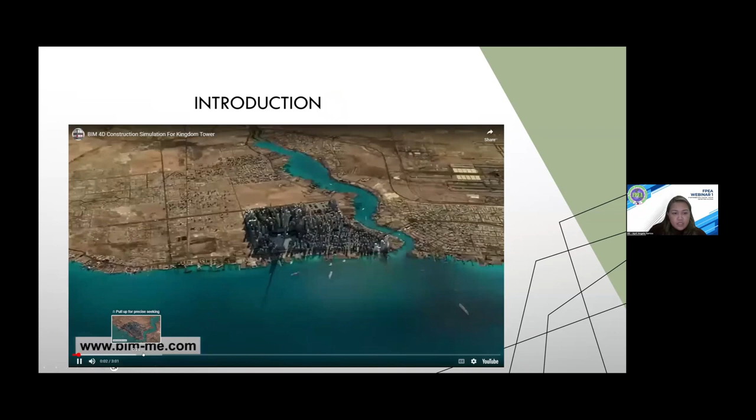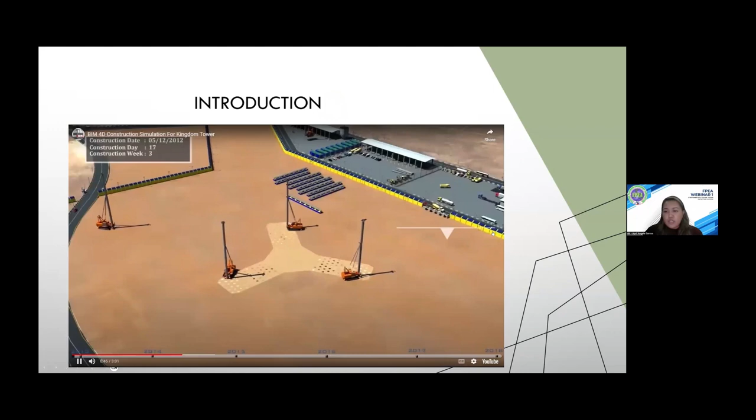Does anyone know about 4D? Do you have an idea about what 4D is? Have you seen videos like this?

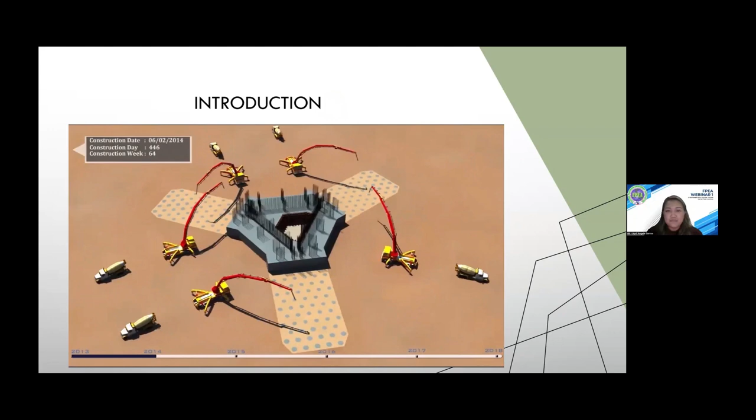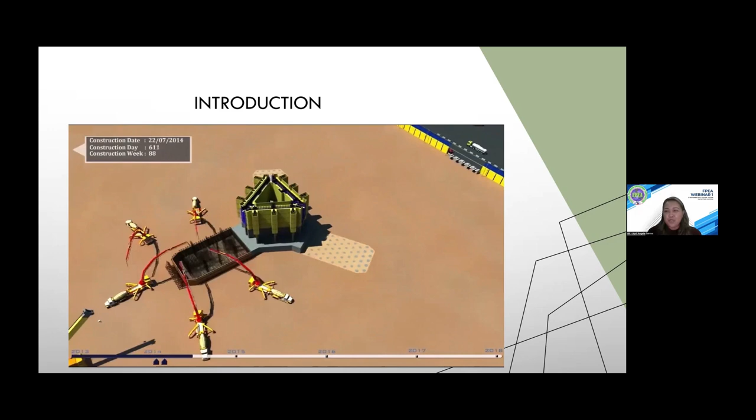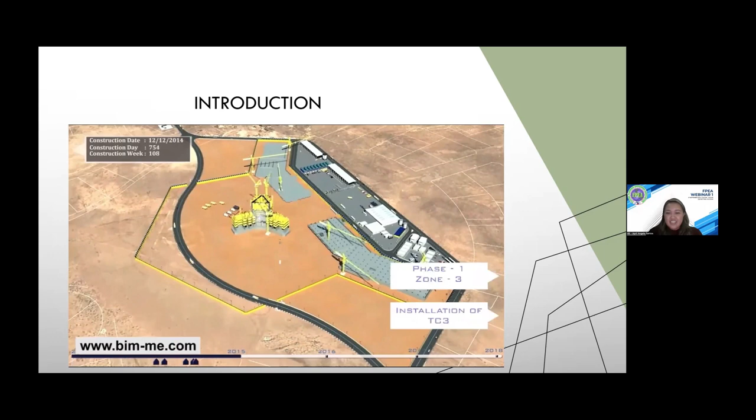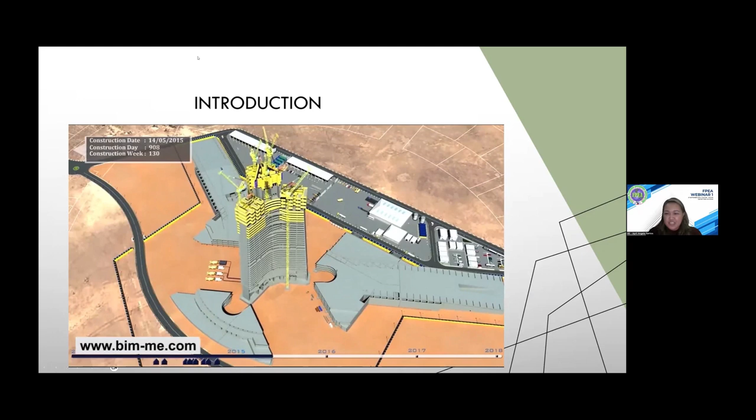But in 4D in construction, has anyone among the attendees seen or experienced doing a 4D model? Anyone? Or are you all asleep?

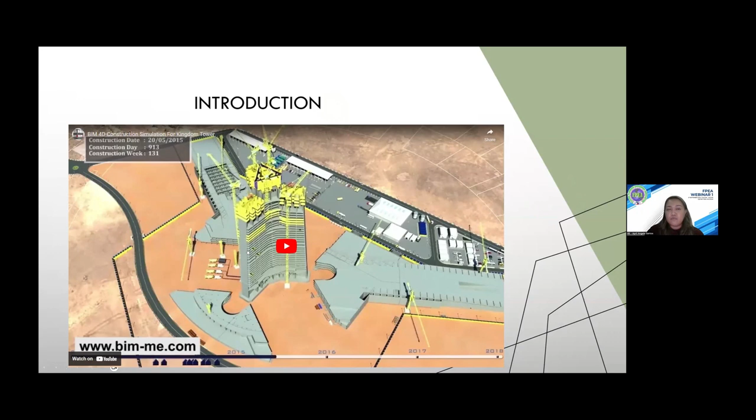So why is it called 4D? We have 2D, 3D, 4D, 5D, 6D, I think up to 10D in other countries or firms. When we say 2D, these are the plan drawings, or in terms of Gantt chart, planning, or our documents - those are what we call 2D.

And then 3D, which is the model, has XYZ, that's why it's called 3D because it's 3-dimensional. So this is a BIM model.

A BIM model can be parametric or non-parametric. Parametric means the parameters within the model. In planning terms, this can be the user fields, resources, things like that.

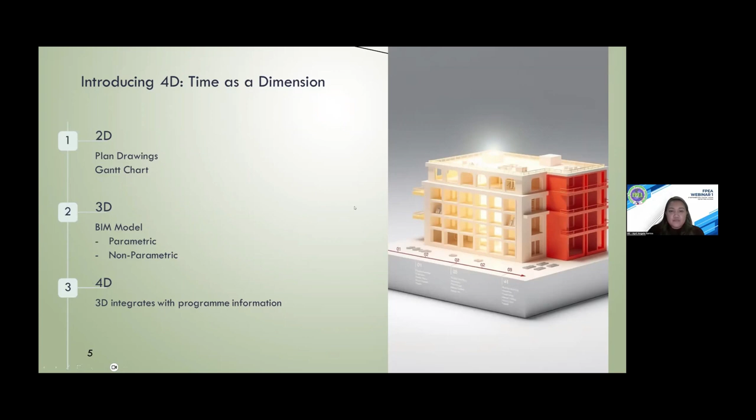When we talk about 4D, we introduce the concept of time into the 3D. So 3D plus time or program information - that comprises what we call a 4D model. Then I think 5D would be cost.

Maybe for some of our attendees who have construction experience, these are some of the challenges for traditional construction. First is time management, because in a project, especially a big one, there will be thousands and thousands of activities in a single project.

So this could mean we don't really see the accuracy of the program. And then there are communication gaps.

How would you relay the program to your project team? Would you just give out the whole program, like the P6, the Gantt chart, to the project team for them to analyze? Or would you interpret that program into something like dashboards?

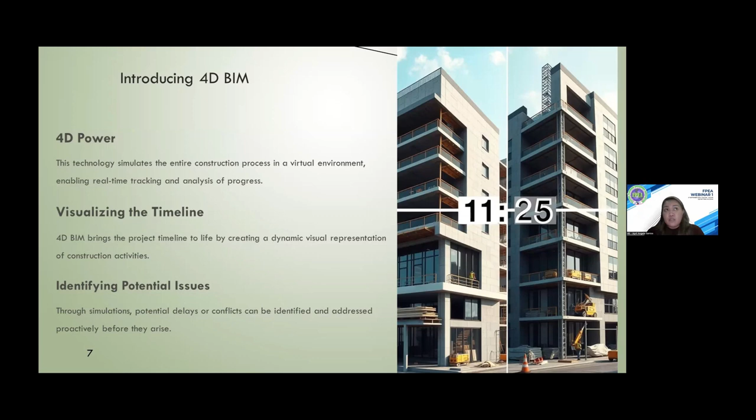So let's go over the benefits of 4D. Let's discuss and share the benefits of 4D.

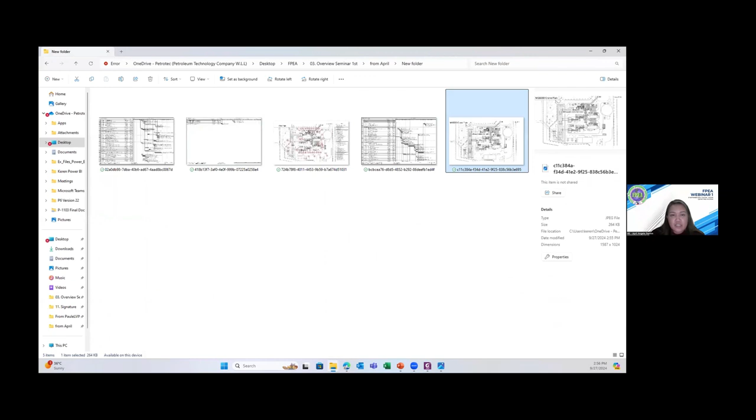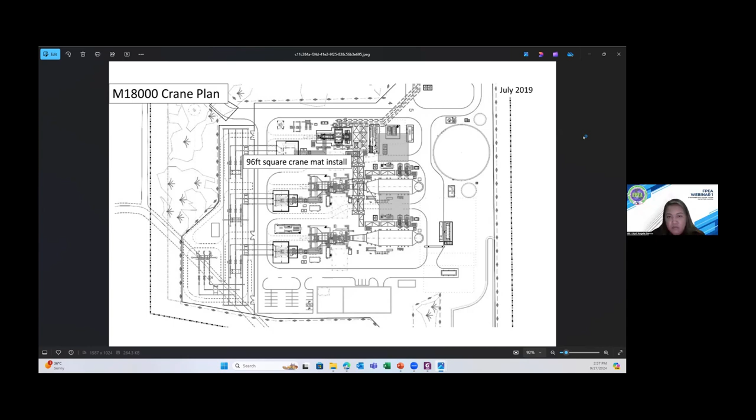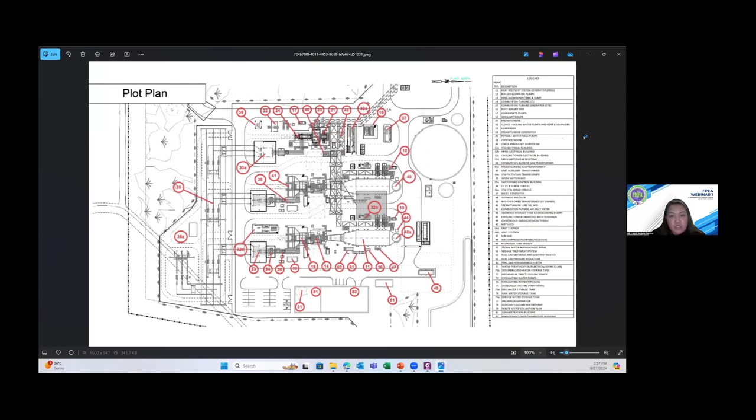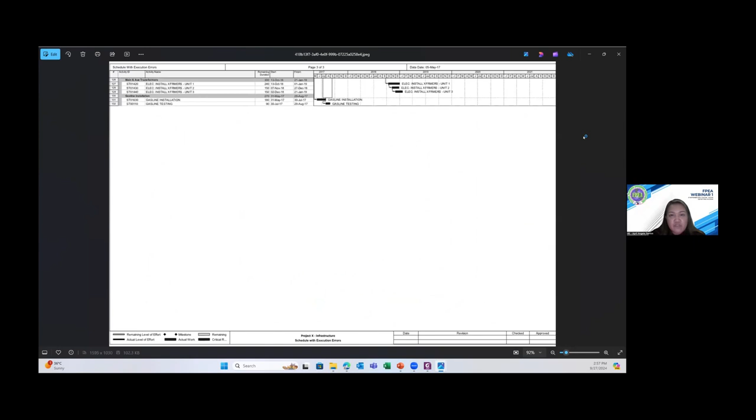Karen, as our boss, will share this program of an oil and gas project, for you to review the accuracy of the program, the schedule. Given this 2D information, the program and then the layout plans.

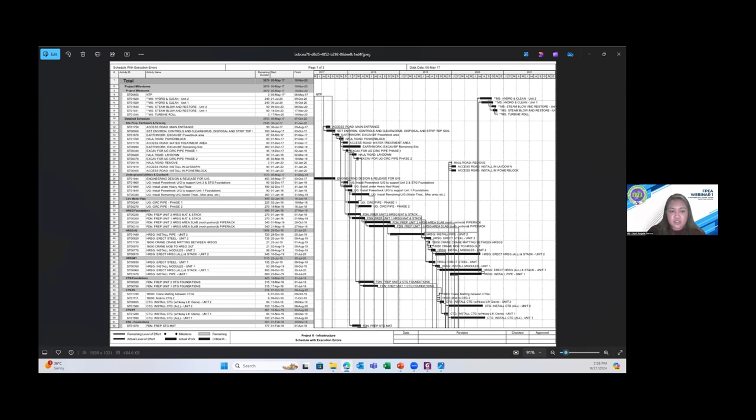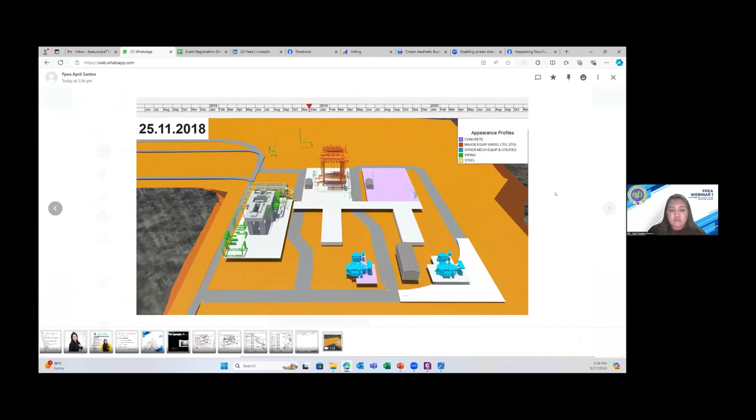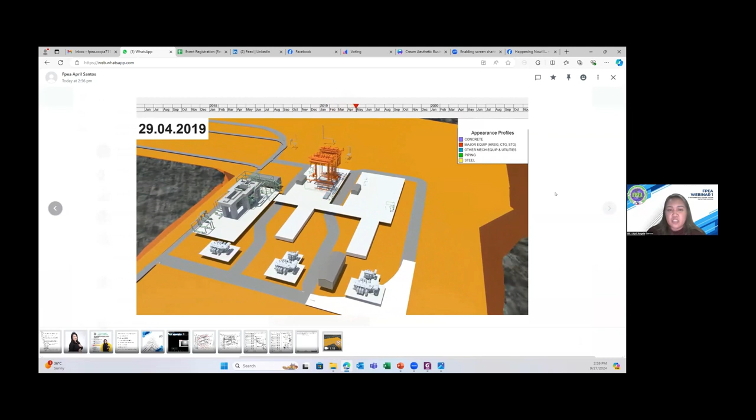How about if Architect Karen gave you this simulation instead? Do you think it would be easier for you to identify what is incorrect in the program? Maybe it's easier, for example if you're in oil and gas, it's easier to identify what are the errors here.

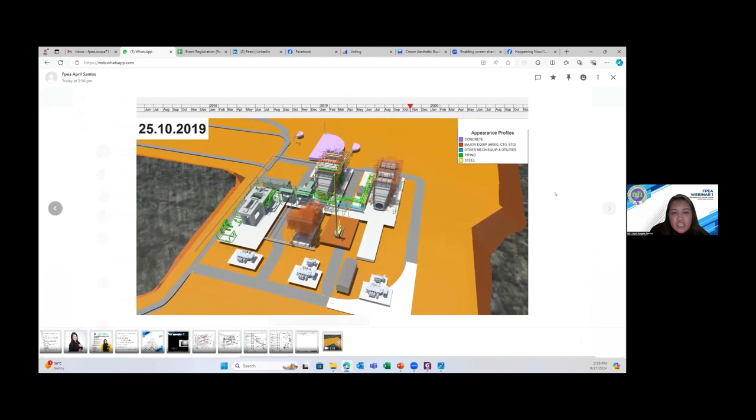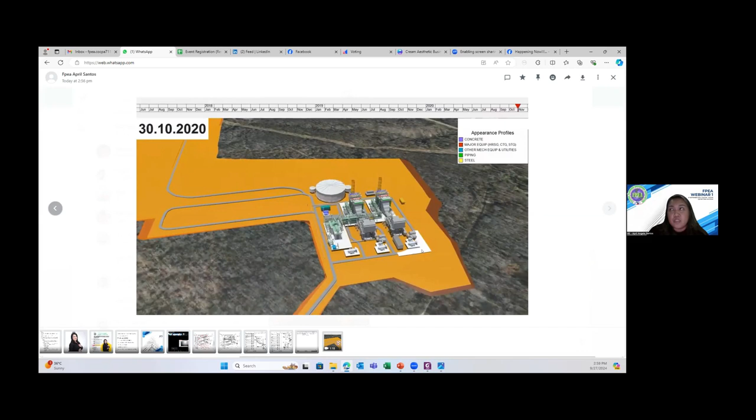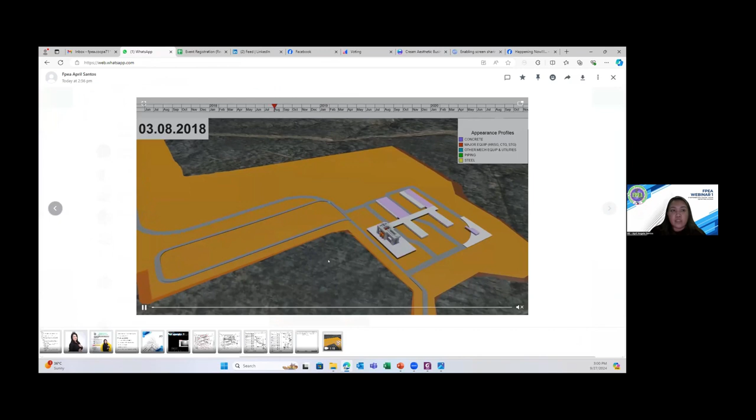So that's what we can see when reviewing a 4D model. It's easier, I think, would you agree if I said it's easier to review the program when it's in simulation form versus in a Gantt chart? Agreed, yeah, agree. Yes, I agree.

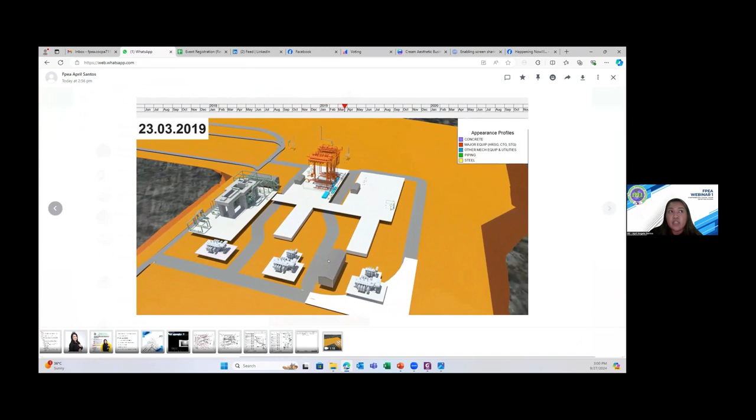In my work, since I create 4D models, I've really experienced these kinds of errors in the program. I only see them while doing the 4D model. So this is actually happening in reality.

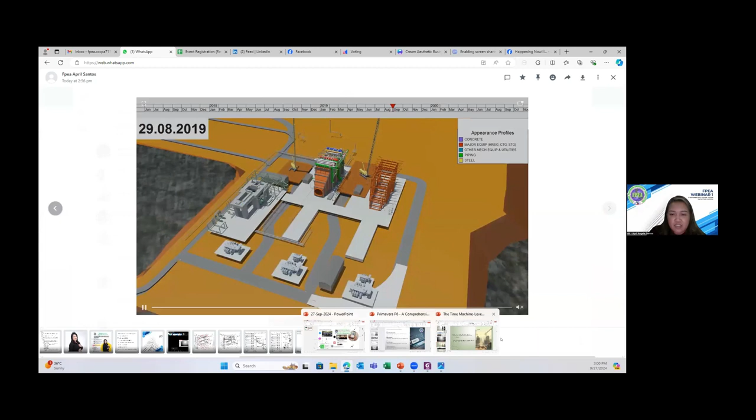Ayan. Kaya na po control.

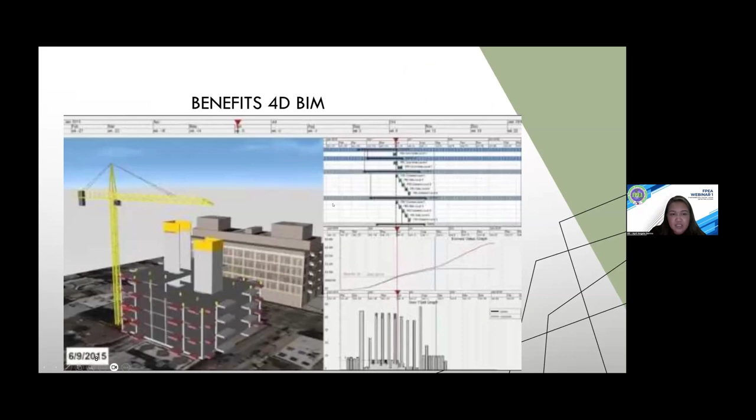So we can say that 4D is an innovative approach to construction project management. We talked about project management earlier. 4D is not a mere visualization but can also be used as a part of project management, so it's not just visual.

So what are the benefits of 4D? It can enhance schedule visualization and conflict detection, like our example earlier. We identified errors in a program from the 4D model, so we can see the clear project timeline if it's correct.

And if there will be some clashes, like what I mentioned earlier, structural versus architectural works, we can use the 4D model and proactive detection to have informed decision making, so our decisions have a basis for why we did that certain decision.

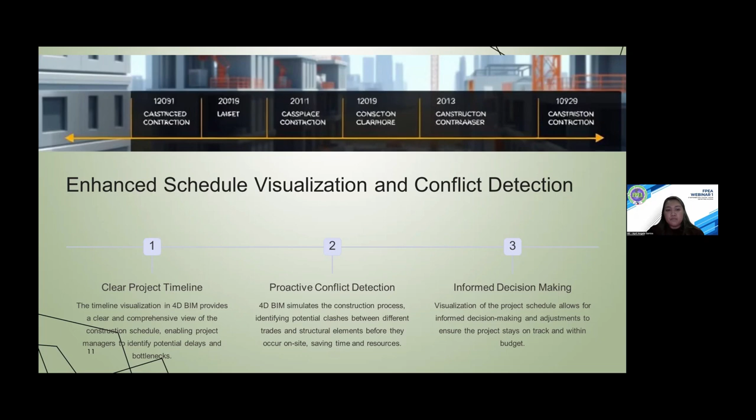Also, when our program is correct, we can allocate the right resources. In terms of BIM, we can actually get quantities from the BIM model and allocate that directly into the activities, so our accuracy for quantity takeoffs that we put into the activities improves.

Because in the BIM model it should be as complete as the actual building itself, we can visualize what works need to be done. And since resources should be properly allocated, we would reduce waste in terms of leveling our resources in our program.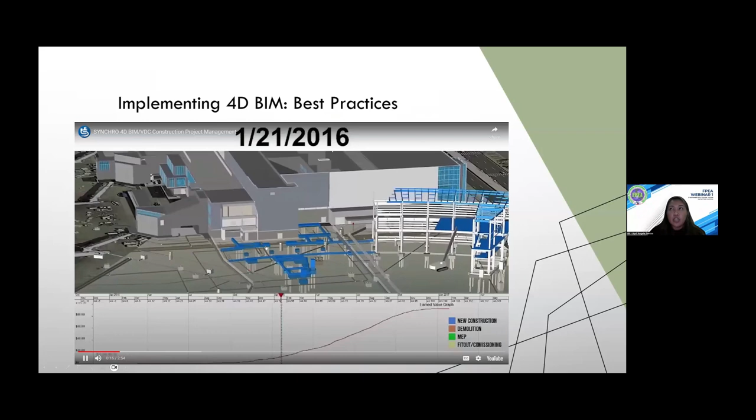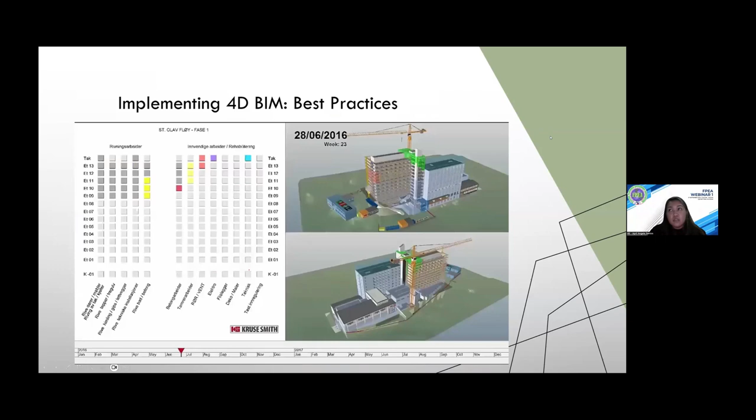So this is what I would call my personal approach on how to start a 4D model, or how you would apply 4D into your projects. This is a summary of my personal experience when I moved here to Hong Kong.

Step 1: define the project scope and goals. Identify the project objectives, define the project scope, and set realistic expectations. When I first arrived here in Hong Kong, my first task was to write down all of the 4D requirements from the tenders, from the current projects our company is doing, and for the tenders we were currently doing as well. I summarized all of that, what the requirements of our clients were.

I think this is the same thing. So if, for example, one of you attendees will be a 4D planner in the future, how would you start doing a 4D model? I think it would be the same as doing a project—what's the scope of the project?

Same with 4D: what are the requirements the client is asking for in terms of 4D? What are the outcomes that the client wants from 4D? Or, you as a 4D planner, what are the outcomes you can provide to improve project management using 4D as well?

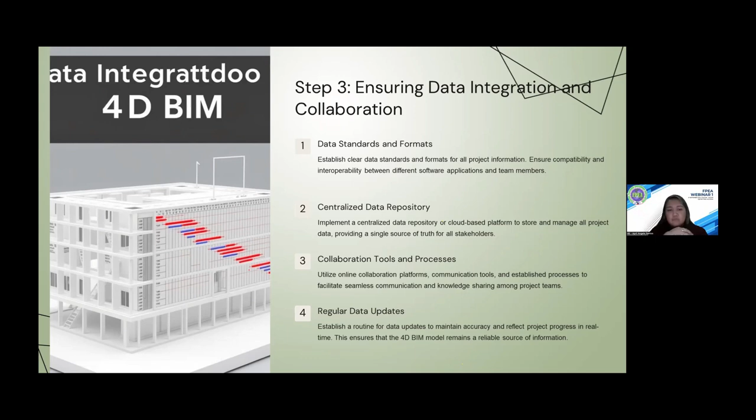That's what we're saying—for example, with productivity, we can perhaps create a database for that, a productivity database, based on resources, those kinds of databases.

Next is change management and user adoption. Even though we've made a lot of advances, like the software and databases I mentioned earlier, there are a lot of people in the projects who are still, I would say, in a traditional mindset. So how do we try to change that traditional mindset?

So we reach out to projects. Since I am a trainer for a specific software, I was able to give them hands-on training. And then from that training, there will be questions thrown out, like how to do this, is it possible to do this?

So they start to appreciate how to do 4D and how 4D can help their everyday activities. So we have trainings, and I think we always have an open line to projects if they have a question on how to do things.

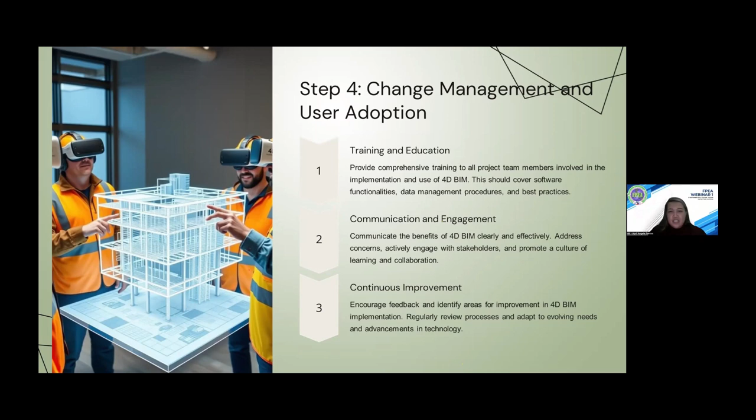Step 5 is overcoming implementation hurdles. As part of our standardization of BIM, including 4D, we had to write BIM standards, including 3D, 4D, and 5D. So we wrote a standardization, and how we did that was through a baselining program.

It's not a baseline program exactly—I mean baselining of where we currently are in terms of 3D, 4D, and 5D. What do we need to improve to get to the point we want? That's how we did our standardization. And then resistance to change, I think that's part of the training, and also the technical complexity.

I think the hardest hurdle in doing 4D is resistance to change. Construction is an old industry, and the way of doing a construction project is still traditional. Not all, but a lot of companies are embracing technologies like 4D BIM that can benefit them. I think just reaching out to people and showing them what a 4D model can do, what output it can produce, can be an answer to that resistance to change.

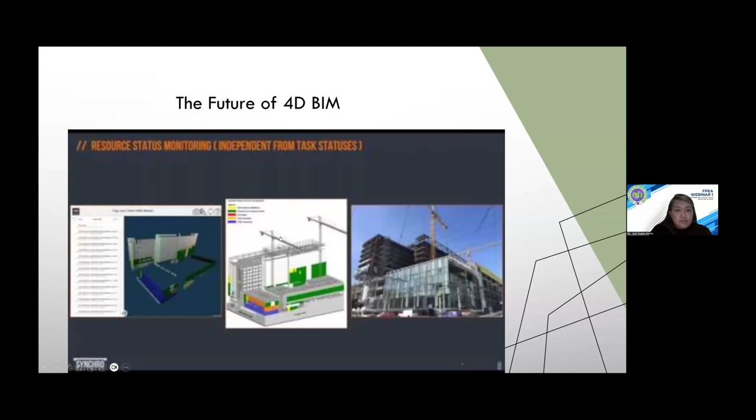I think this is the last one - step 7, adapting with evolving technology. Doc Elvin already mentioned AI and similar things earlier. I think that's not just the future of 4D, but the future of construction. We have cloud-based solutions, like what Doc Elvin mentioned earlier - cloud-based. I was also able to have hands-on training with Oracle OPC Cloud, or Oracle Primavera Cloud. That's one cloud-based solution currently in the market.

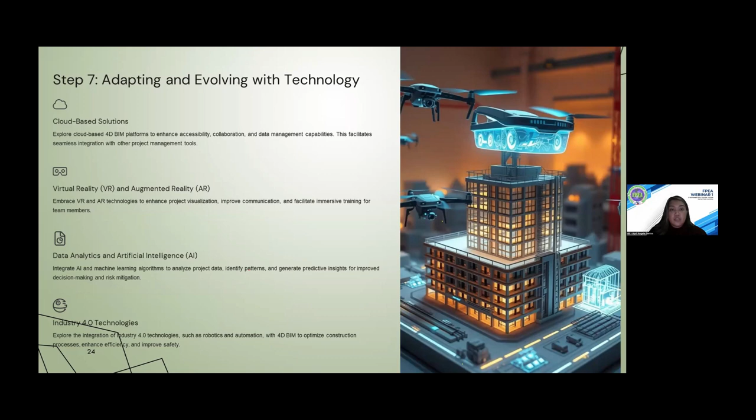I'm not sure if you've seen VR and AR - VR HoloLens, or the new Apple vision glasses. There's also data analytics, artificial intelligence, Industry 4.0 technologies, IoT - Internet of Things. This is the future of 4D, or the future of construction in general. Since I repeatedly say that 4D is a project management tool, we need to adapt to this evolving technology.

The future of 4D - what are the new or future trends in terms of 4D? Dynamic visualization, data integration, simulation and analysis, collaboration and communication - so that's 1, 2, and 3.

This is what I mentioned earlier - how would you collect all of that data and use it in a 4D model, then create an output from that 4D model for the benefit of the project. From that output, you can use the 4D model as a means of communication with your project team.

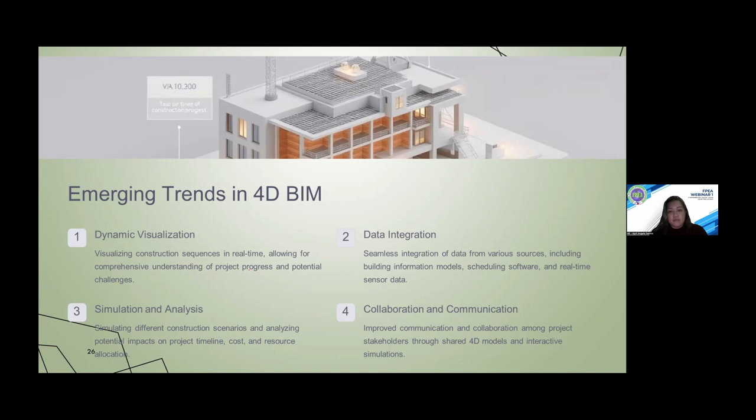I think just keep up with the different construction technologies that would come up - IoT, Internet of Things, AR, VR. We have that on our site - we carry an iPad, and you would point your iPad at a specific part of the project where there's a QR code. Then you'd see the BIM model on your iPad, and as you roam around with the iPad, the BIM model appears embedded in the actual project site - that's augmented reality. Virtual reality is when you use glasses. AI is the predictive analytics based on the data that you have gathered.

So 4D can be used to transform project management. Why? Because you can enhance planning and scheduling, improve accuracy of the program, and do risk mitigation in the early stages of the project. Cost optimization, and again, improve communication and collaboration. These are all part of project management, which is traditionally done, and then you add on a 4D or 5D model just to transform your ways of managing your project.

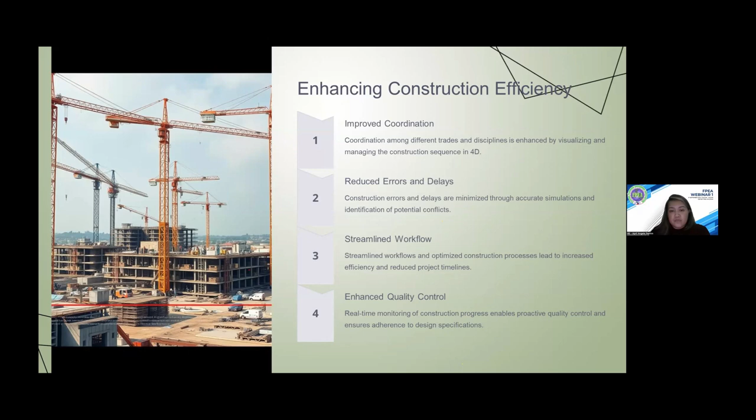I think sustainable construction is also popular now. What's that called... I'm not sure if you've heard of concrete CO2 emissions from a project. Sometimes they compute that. For example, in a program, the carbon from your concrete tasks, the concrete activities in your project.

Was that leveled properly? Because sometimes there's software where you input your P6 program into it, and then it can compute the carbon emission of that project. I think how they do that is through resources. If your program is resource loaded with a concrete resource, then they can compute that.

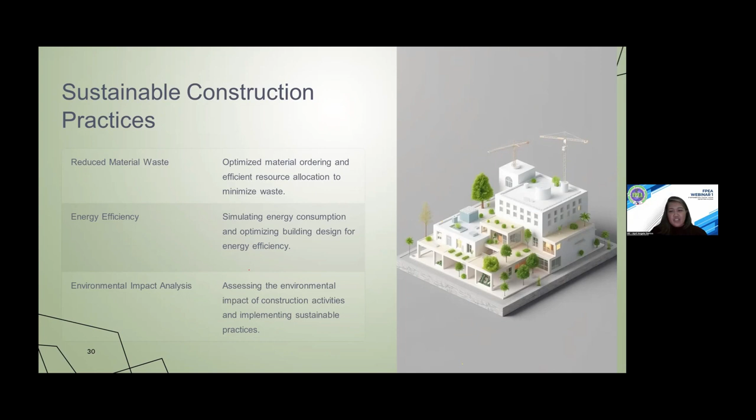So the future of construction is automated construction. Have you heard about prefabrication or assembly works? Yes, okay. I think in Singapore there's something called DfMA, precast works, or modular panels. That's like prefabrication, because it increases productivity. So they're doing prefab or modular construction.

Then digital twins, as I mentioned earlier, our client in Hong Kong demonstrated the digital twin as how you would construct the project, not how you would see the end product of the project. So how you would construct it, that's the digital twin. There are many definitions of digital twin, so it's not really clearly defined. Maybe when you're in construction you have a different definition of digital twin, and if you're the client or owner of the project, you might have a different definition too.

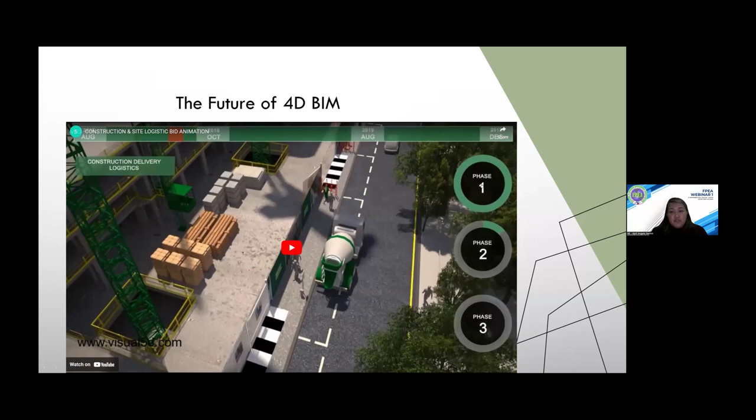Okay, so I think this is wrong - this should not be future 4D BIM, but this is already the last part of the presentation, which is the key takeaways.

So I think to start your 4D journey, just remember the benefits: you'll have better communication with your project, you'll reduce risk of errors or general risk in your project, and you'll have faster completion because of increased efficiency and improved quality of works.

Always embrace for the future. I think the future is already here, matagal nang dumating yung future. Just embrace it.

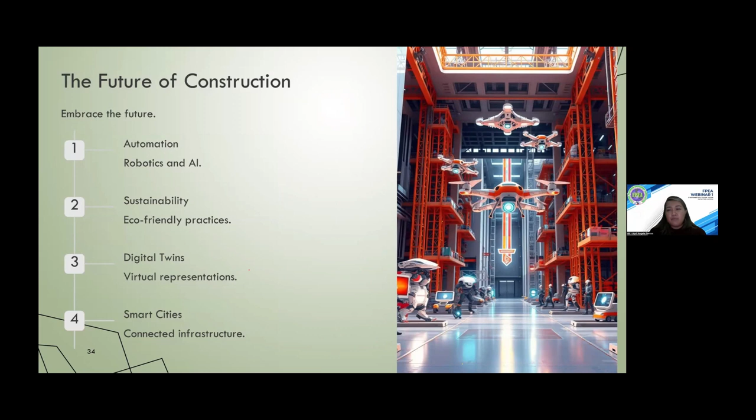As Doc Elvin mentioned earlier, just learn as you go. Kung may mga pagkakataon na makapag-aral kayo ng mga trainings, makapag-attend kayo ng mga webinars like this, just grab that, kasi marami kayong matututunan.

I think because most of us has an experience of project management, maybe you can also be an influencer of 4D if you are able to get a chance on how to do 4D. Maybe you can start by attending a training on a software or a 4D, and if you have a small project, just experiment on it.

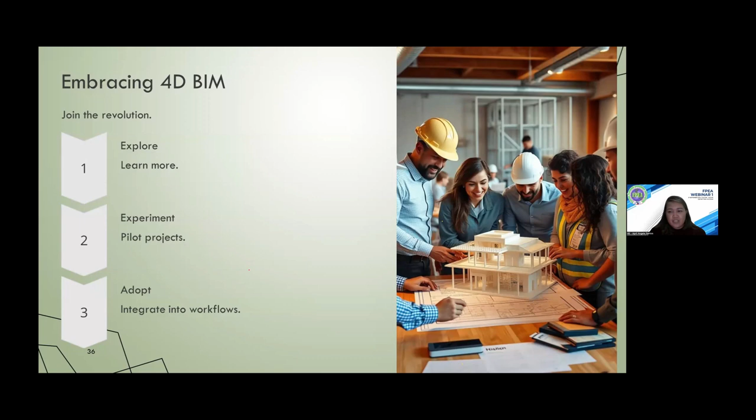Then integrate workflow. Yun nga, sabi ko kanina, you work on method A, then pag-aralan mo ng pag-aralan, then meron pa palang mas madaling method. So that's just how things should be done, wag ka lang maging stuck up, and construct the future.

Always embrace change, and always have an open mind on things, just learn.

And then teamwork, work together. I mean, 4D is not just visual, but you can use a 4D model to communicate. And then yeah, just deliver excellence.

You can always think, because we are project managers, may mga project management experience tayo, and mga Filipino tayo, we always strive for the best results, diba? I hope you agree.

And I think that concludes my presentation, thank you po so much. I'm not sure kasi nagkakaroon ako ng trouble sharing my screen. So I was actually planning to share the method of how to do a 4D model from the start, but maybe next time na lang siguro.